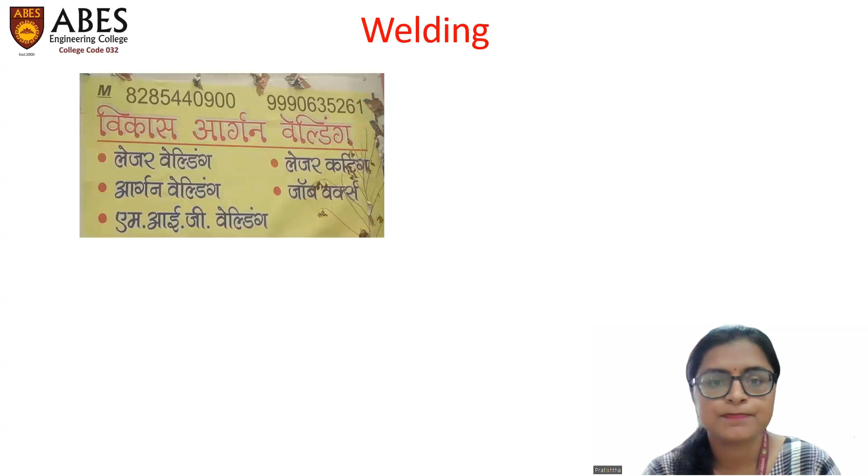When you hear the term welding, what comes into your mind? This, this, this, and this. From a common person's perspective, welding is all about this only. One thing common to all these pictures is they are all from casual welding, or you can say roadside welding. Here you can see in this signboard or hoarding, they have suggested some welding processes for joining and cutting operations.

I would like to show you some more pictures related to welding in the next slide. Now please have a close look at all these pictures. This is the picture of a manufacturing firm, an automotive or automobile manufacturing firm where car body is manufactured. You can see a number of cars here: 1, 2, 3, 4, 5. This is a car body manufacturing line where there are some workstations here, here, here, here.

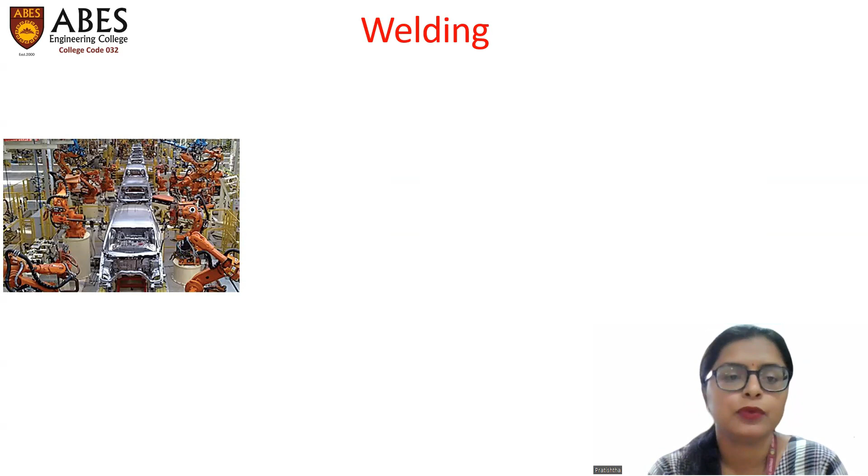So there are a number of welding machines equipped, and these welding machines are all equipped with a robotic arm. Some very critical welding operation is going on. Why I used the term critical, I would like to explain at the end of this slide. I would like to show you some more pictures related to day-to-day or current welding operations.

In this second picture, what you can see here is a manufacturing of a ship body going on. You can see a very large size shape of a ship here. It is obviously like a naval ship, and some manufacturing of this ship is going on like this. You can scale this body with the height of these people roaming around here. So this is a very large body of ship building going on with the help of some mechanical operations, and obviously, welding is one of them.

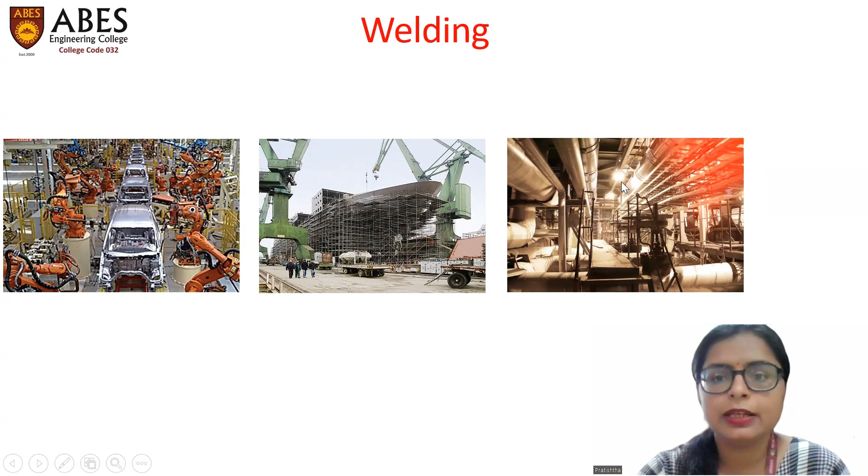What you can see here in the third picture is an inside view of some pipelines, maybe from some refinery, oil and gas refinery, petrochemical industry, or oil and natural gas sector, because networks of pipelines are found in all these industries. So some repairing work is going on. If you can focus here, some welding related repairing is going on here.

I would like to show one more picture. What you can see here, there is a very large aircraft. This aircraft body is being manufactured here with the help of some mechanical operations, and out of these mechanical operations, welding is one of them. So you can see the critical operations or uses of welding in all these pictures.

One more picture in which you can see a mechanical workstation where this round shaped object, called a bearing, is undergoing some mechanical actions. Maybe some surface finishing operations, and maybe some joining - there can be many mechanical operations on a component like bearing. So some mechanical work is going on this bearing.

So what I would like to show you through these pictures is that the horizon of welding is not limited to only roadside applications, but is something beyond that. You can see the application of welding in a car manufacturing firm, in a shipbuilding manufacturing firm, in pipelines in petrochemical, nuclear or power plants, everywhere, and in aircraft building. So the horizon of welding is well beyond roadside welding. From a researcher or mechanical engineer point of view, you should focus on these critical or complex operations of welding.

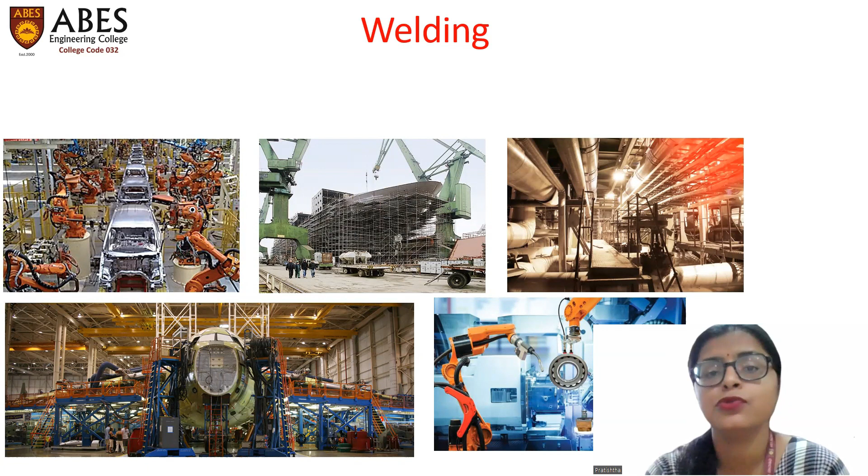Can you imagine from where it started? The welding, from when man has started using welding. I would like to brief you about the history of welding. History suggests there are some evidences from the Bronze Age. You can see the age here. From bronzes, I have collected some pictures for you to show the evidences of welding in the Bronze Age.

Before the Bronze Age, man was using only stone. So you can say from the Bronze Age, humans have started using metals. So the use of welding is as old as the invention or the use of metals.

In the Bronze Age, humans were using different types of metals, like electrum. Electrum was 75% gold and 25% silver. Basically, the Bronze Age was before the Iron Age, so mostly humans were using silver or gold.

From this evidence, like the first image, there is a cup made up of electrum, and at the bottom of the cup is the magnified view. There is some soldering of the base and the upper body of the cup, joined with the help of a solder joint. You can see a solder joint here. So you can say in the Bronze Age, people were familiar with soldering.

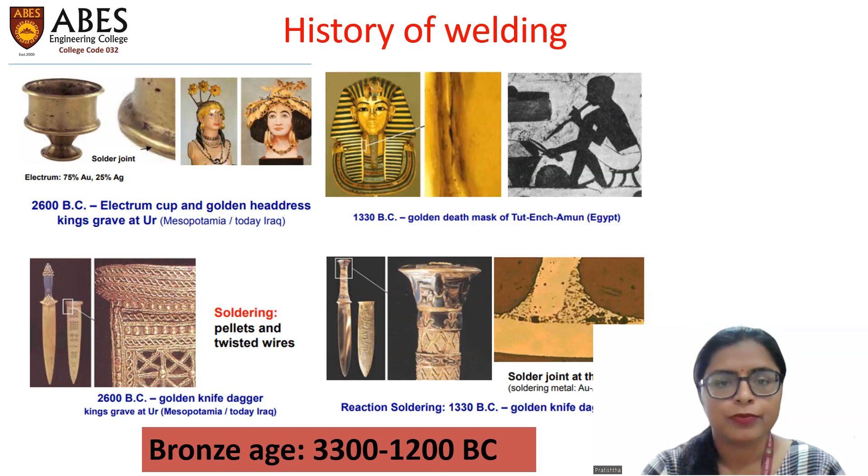Moving towards the future, in the next stage, the Iron Age, there are some evidences that people were familiar with the forging process. The metal was heated, then some mechanical action like hammering was applied. He is using a hammer here, so it is beaten or compressed with the help of a hammer to get a joint. This process is called forge welding.

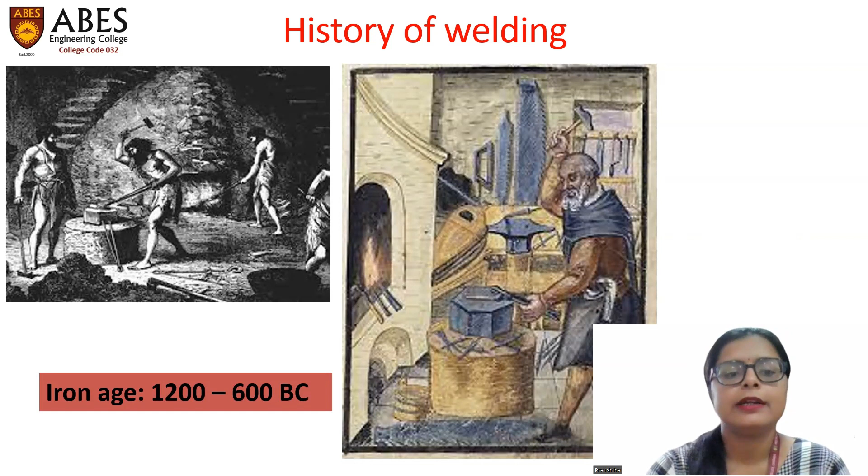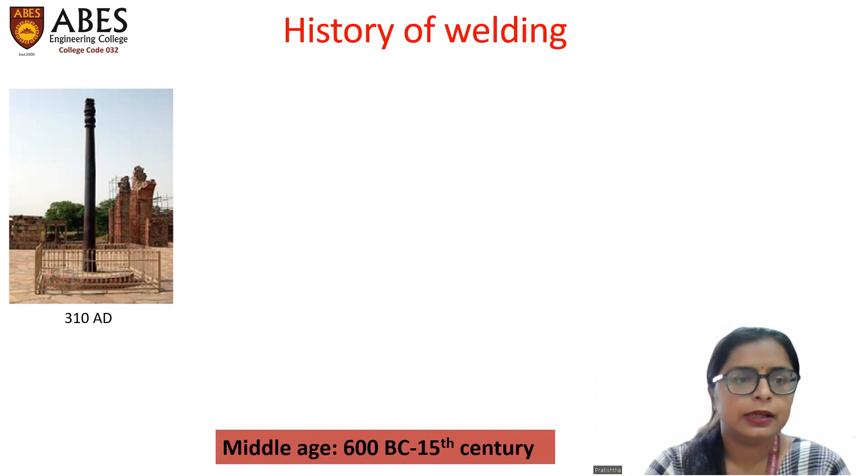So in the time of the Iron Age, people were familiar with forge welding. They started using the art of forging. So it was soldering in the Bronze Age, and from the Iron Age he started using this forge welding. In the Middle Age, there are some monuments like this iron pillar, constructed in 310 AD. It was in the Middle Age, made up of iron and fabricated using the welding process.

So you can categorize: in the Bronze Age, people were familiar with the soldering of gold, and during the Iron Age, especially in the Egyptian and Middle Eastern parts, people started using tools to hammer the material. They were familiar with the art of forging, and lap joints were prepared with the help of forge welding.

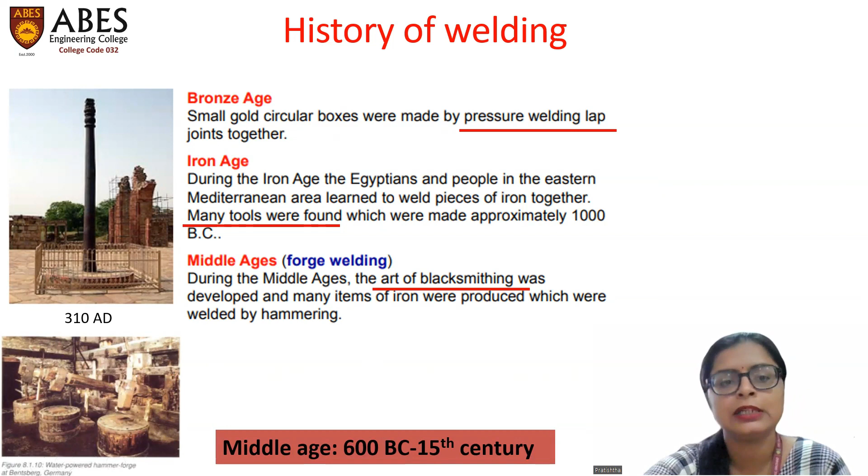In Iron Age, people were familiarized with hammering and used only human force for forging. But in Middle Age, the art of forging was modernized as new tools were invented, such as water hammers. The human hammering action was replaced by water hammers to apply compression or forces.

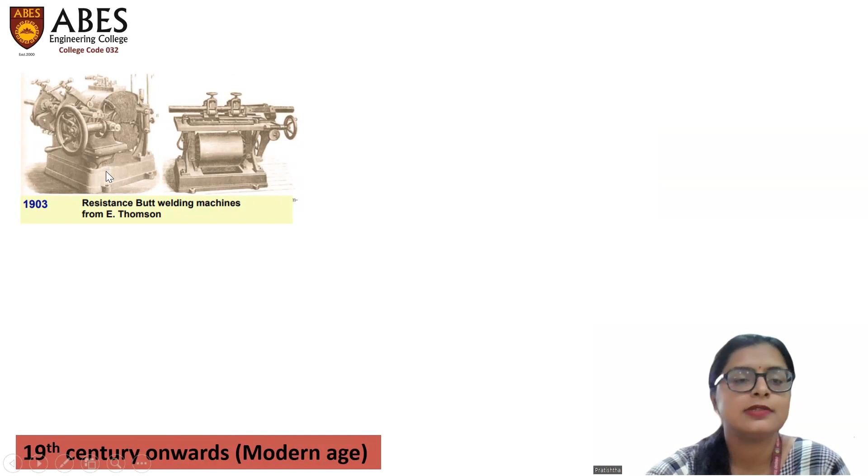After Middle Age came the Modern Age from the 19th century. You can see some machines now. Earlier, people were using only mechanical action, with soldering and forge welding. But in the 19th century, electricity was invented, and people started using electrical power to produce the joint.

In 1903, you can see resistance butt welding machines. Nowadays, the resistance butt welding machines we use are very different from these; they are bulky, complex, very robust, and highly automated. So in 1903, with the invention of electricity, there was also an invention in welding with resistance butt welding.

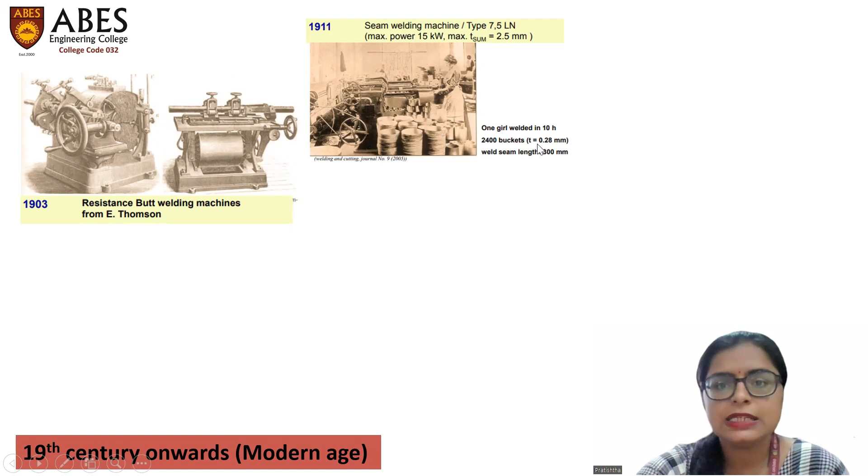This is a seam welding machine. In 1911, one girl is welding and preparing buckets. In 10 hours, she's producing 2400 buckets, with sheet thickness of 0.28 mm and a given seam length. The production rate was much lower because this was before industrialization. There was no industrialization, no import, no export; everything was produced only for consumption, whatever was required.

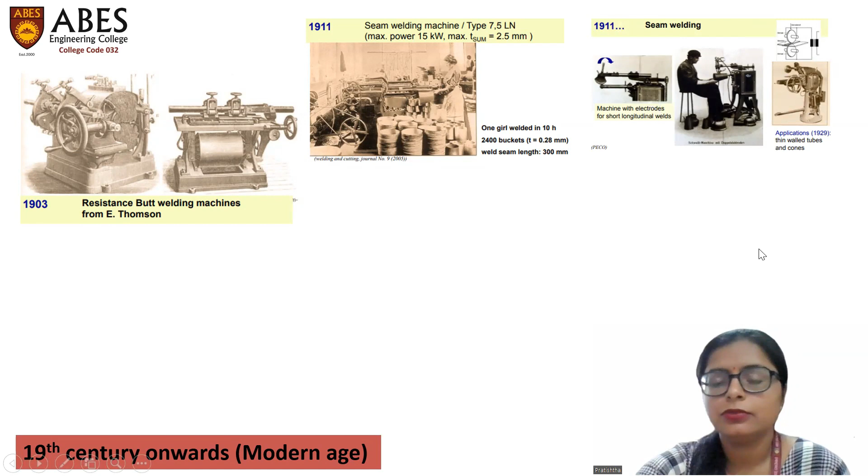So the machines were designed such that the production rate was very low. In 1911, you can see how this seam welding machine looked, with an electrode for short longitudinal welds. It was very different from today's machines.

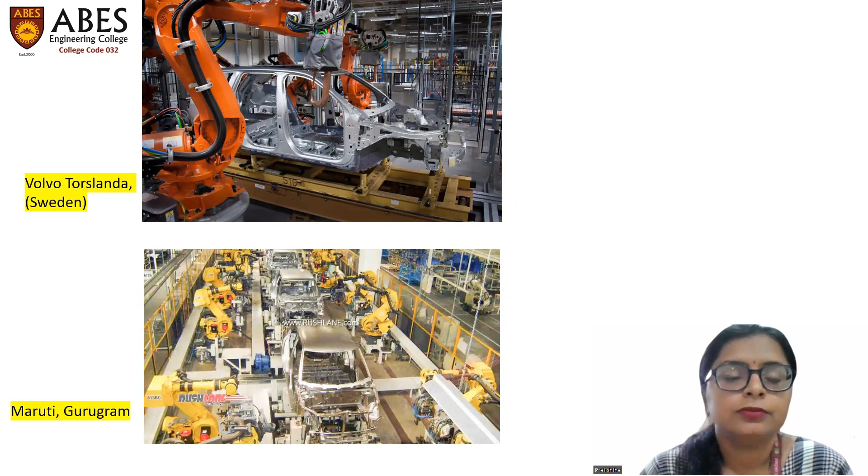With all this information, you can understand how these welding processes have evolved with time. You can imagine how the welding stations look like. I'll show you these two pictures. This is from a car body manufacturing station in Sweden, from Volvo, a renowned automobile company. This is how the car body manufacturing station looks.

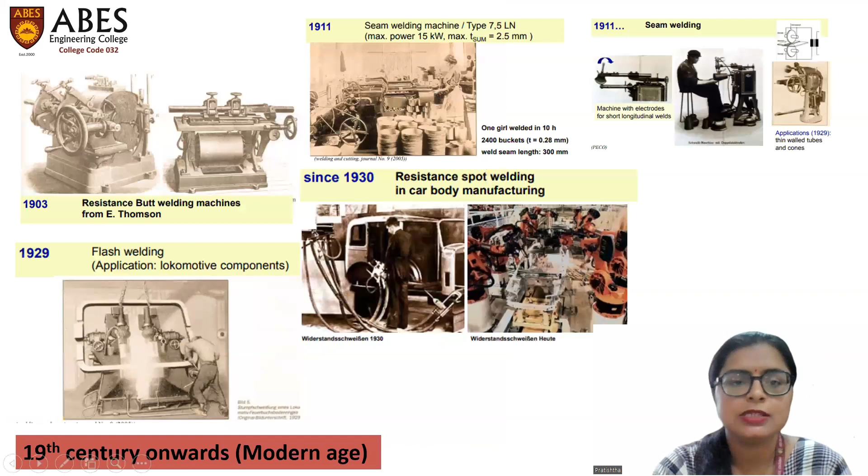Here in India, we have also adopted automation. In Maruti Gurugram, this is the site of the Maruti company, where they have this type of car body manufacturing machine. So you can see how far we have reached till now.

Based on evidence and literature, I have collected this data regarding the evolution of welding processes in the modern or contemporary age. In 1881, we started using arc welding. In 1900, gas welding. In 1903, resistance welding. In 1907, shielded metal arc welding. We started with arc welding, then began using shielding gases with arc welding, leading to shielded metal arc welding in 1907. This took almost 30 years to know the art and importance of shielding in arc welding.

That's how we evolved. In 1930, we have manual metal arc welding. In 1940, GTAW. We started using different types of electrodes and shielding gases over time. From 1940 to 1945, we evolved with GMAW, that is gas metal arc welding. And in the 1980s, with all these processes, we adopted automation with the help of robotics.

So all the workstations where we are focused on the production rate and efficiency of the system, or mass production, we have adopted robotics in welding. From 1980 onwards, there is very rapid growth in the manufacturing sector also.

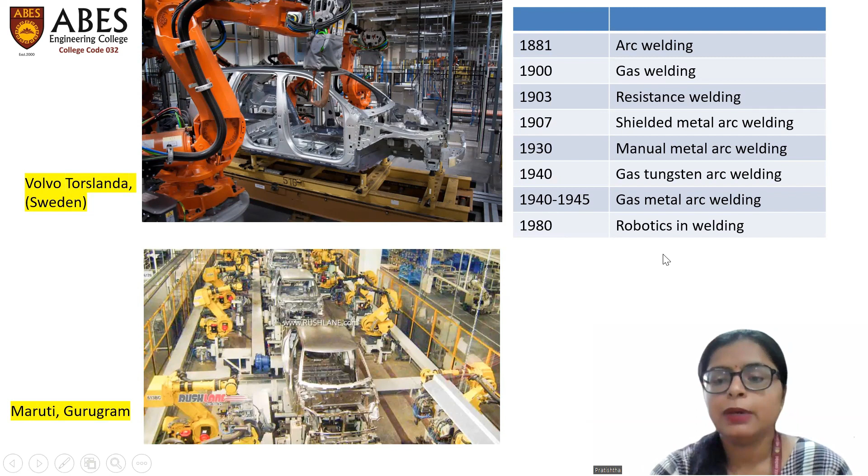With all this foundation, we can understand how welding has evolved. It started with soldering using gold, silver, or alloys of gold and silver. Then we started using forge welding with human action by hammering. Then we discovered machines to apply mechanical action, so we invented the water hammer, and forge welding further evolved. Then with the invention of electricity, we understood the art of arc welding, then resistance heating, then further modifications in arc welding and resistance welding.

So why have we put that much effort into the evolution of welding, why is it so important? I would like to show you some pictures from newspaper cuttings to show the importance of welding. This is a news article from a very recent time, in 2020.

There was a train accident in 2016, and this report shows that the accident was due to failure of welding. There are weld joints in the car, rail coaches, on rails—welding is everywhere. So the failure of a weld joint can lead to a disaster. It's a very crucial application of welding, where failure or an accident can lead to loss of life. The reason for this train accident was weld failure.

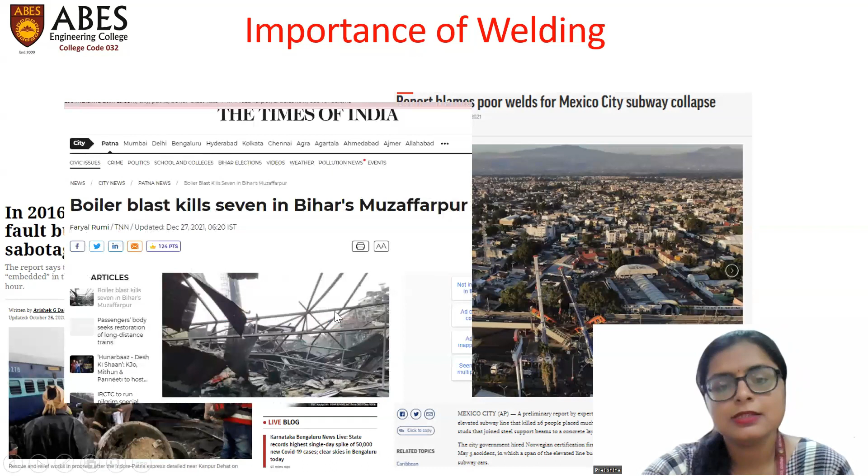So from these articles, you can understand the importance of welding. We cannot go casually with welding. Yes, there are some casual applications, like if you're using a chair or desk, the metal structure was formed using welding—we can go casual there. But if you're welding for a power plant, automobile, train, rails, shipbuilding, or aircraft, you cannot go casually, because it costs a lot. That is the horizon and importance of welding.

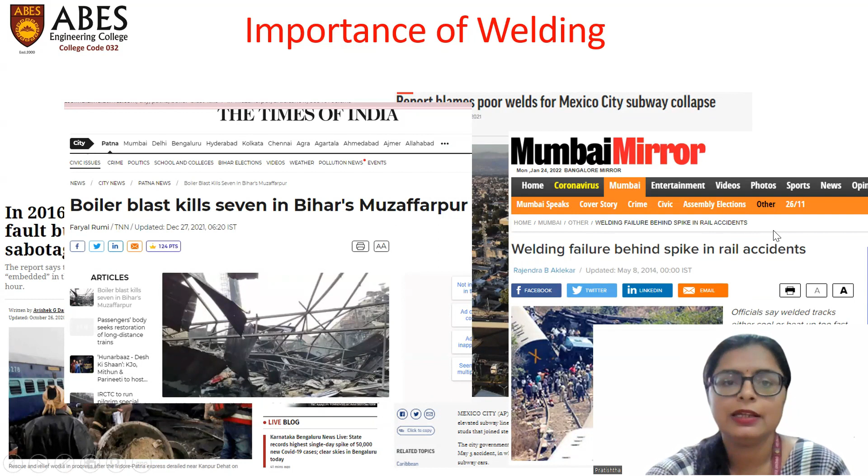I have shown you the history of welding. With this overview, I would like to stop myself here. I'll get back to you soon with some more interesting topics on advanced welding in the future. Thank you so much.